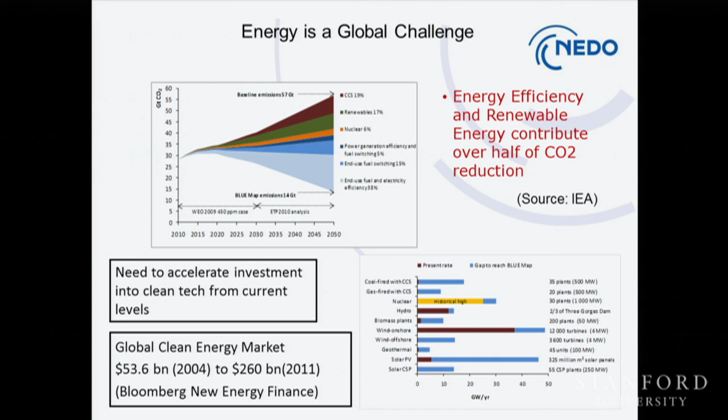Now, in order to reach that, IEA has also done a lot of work in terms of what kind of investments will be necessary. It doesn't talk directly about the CO2 reductions in the transportation sector, but you have to do 35 plants of CCS, 20 plants or 30 plants of nuclear. We have to invest this much in wind onshore. We have to build 55 concentrated solar power plants, etc. So we have this much of investment to do.

Now, this blue part is what we have to do, and this brown part is what we have been doing. So actually, looking into the investment that is necessary, there's a huge amount of investment that has to be done between now and 2050.

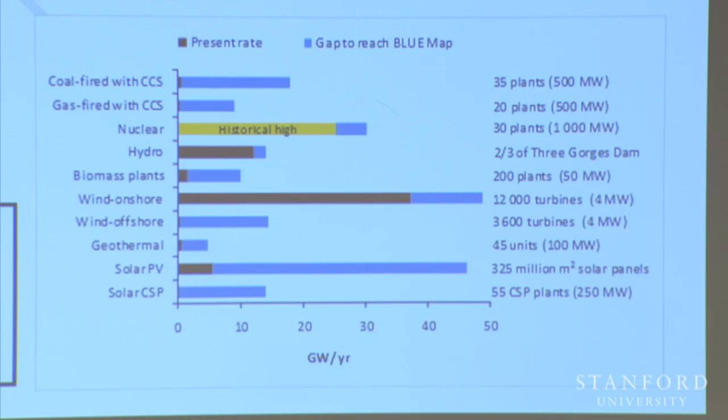If we look at the global clean energy market, according to Bloomberg New Energy Finance, from the level of 53 billion in 2004, it has been increasing to 260 billion in 2011. So actually, even now, at this meager level, we have already increased the global clean energy market by a huge amount. And that shows how much investment potential there is in this market.

This is a slide which I often use, mainly because it tells you something that is common sense. You divide CO2 emissions by energy supply, multiply it by energy supply, you get the same thing. You divide by GDP and you multiply by GDP, you get the same thing. So the right-hand side and the left-hand side is the same. Now, what we want to do is to reduce CO2 emissions, but at the same time, not decrease GDP, but rather increase it or keep it.

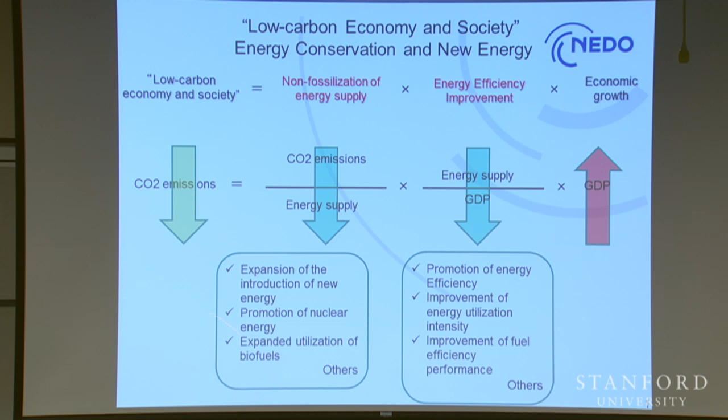Now, in order to do that, you have to reduce these two. So this is CO2 emissions over energy supply, which means non-fossilization of energy supply. So you have to promote nuclear energy, renewable energy, etc. You have to also decrease this energy supply over GDP, that is energy efficiency. So this is promotion of energy efficiency as a whole. So you have to decrease these two to reduce CO2 emissions and increase GDP at the same time. So this is very common sense, but this is something that we have to do.

One of the things that we are thinking in Japan and actually around the globe is this concept of smart community. I think you've heard the word smart grid in a lot of places, for those people who have been involved in the energy area. But this is a concept that we are trying to promote in NEDO. And we actually established a new department called the Smart Community Department, mainly for that purpose.

Especially in the case of Japan, because of our energy situation and land situation, we have to have a lot more emphasis on rooftop solars and distributed generation, because we just don't have the wide lands like in the US.

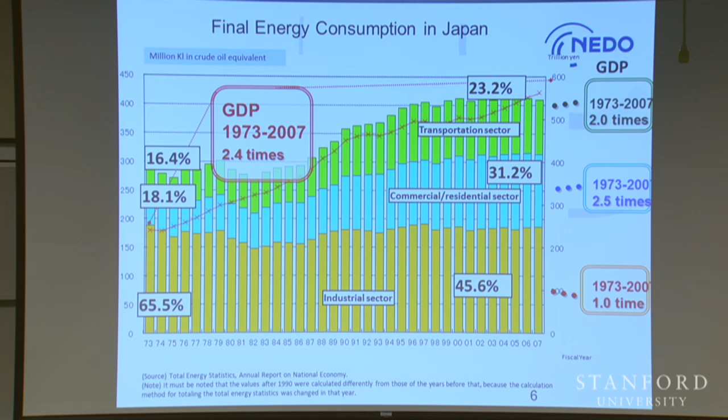The industrial sector, because it's relatively small, you have to deal with a relatively few number of people, it's much, much easier to reduce CO2 consumption than in the transportation sector and the commercial residential sector. And if you look at the transportation sector, it actually uses about a quarter of the energy use. So in order to reduce CO2 emissions by a huge amount, you have to tackle the transportation sector. Let us take a closer look at transport.

The left-hand upper side, transport energy use has stabilized the total from about 2000, and it's actually reducing a little bit. Share of passenger transport has been increasing from 52% in 1990 to 62%, and cargo is like this. If you divide these in two sectors, in passenger transport, the share of automobiles, railway and air is stable. Automobiles in Japan is about 2/3. But this shows that in order to reduce energy consumption in this transportation sector, you do have to tackle passenger transport, especially automobiles. In cargo transport, share of automobile truck has increased from 50% to 63%.

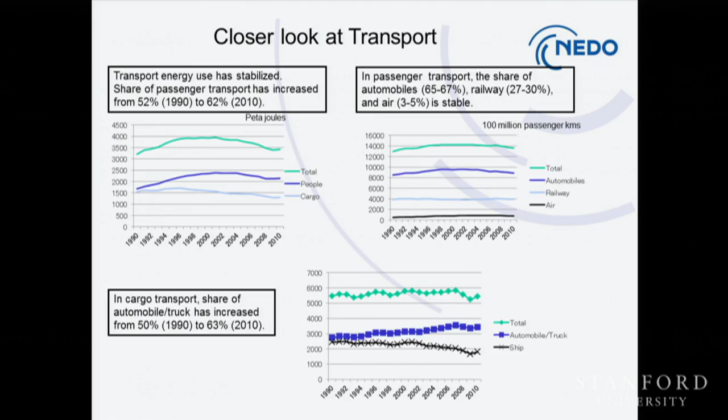That mainly is kind of a factor of people wanting more convenience. If you go to Japan, it's actually very, very convenient because you can have deliveries on time, a little bit different from UPS and the cargo delivery system in the US. You can actually say, oh, between 10 a.m. and 11 a.m. So people have been going from just morning to very specified times, and that actually increases the amount of energy that is used probably to make deliveries, but that's a matter of consumer preferences.

This is an excerpt from METI's long-term energy plan that was made in 2010. And this looked at what the consumption of energy in the transportation sector has to be in order to meet Japan's CO2 reduction goals at that time. Now, having said that, I'll give a proviso in that METI's long-term energy plan is in the process of revision, mainly because of the tsunami, earthquake, and the change in the situation related to energy. According to the 2030 energy plan by METI at that time, a lot of the CO2 reduction was supposed to be done through the increase of nuclear power. From 30% to actually 50% of our electricity was supposed to be provided through nuclear.

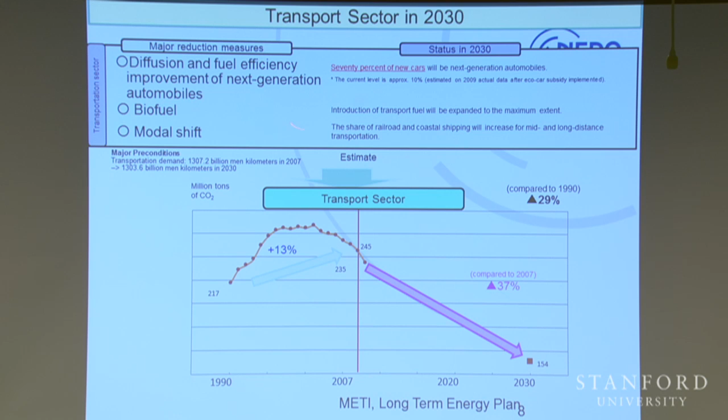The third is to do this through modal shift. That is increasing the share of railroad and coastal shipping for mid and long distance transportation. So those were the kind of options that were being considered, and those are the things that are to be used in the transportation sector.

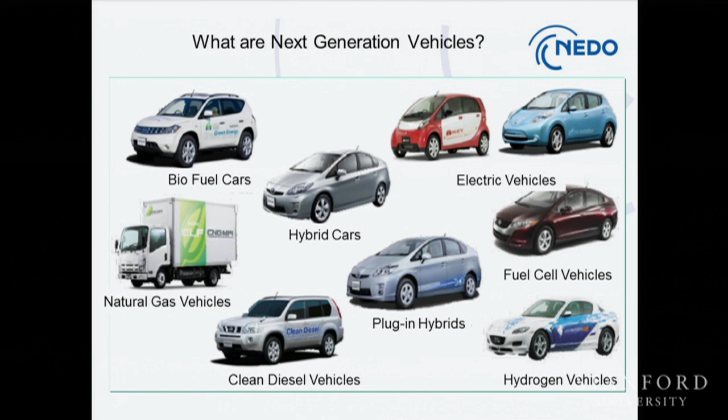Now, based on that, next I'll talk about what are next generation vehicles. So next generation vehicles, as you know, you have biofuel cars, natural gas vehicles, clean diesel vehicles, hybrid cars, electric vehicles, fuel cell vehicles, plug-in hybrids, and hydrogen vehicles. So those are some of the options that are on the table in terms of next generation vehicle options. I'll touch upon a few of them and some of the characteristics of each one.

First is the hybrid. As of the end of 2010, we had 1.4 million hybrid vehicles in Japan, and they are actually the mainstay of what would be termed next generation vehicles. They can reduce CO2 emissions up to 50% compared to current vehicles. But challenges include cost and improvement of batteries, and as I'll talk about a little later, we have been putting in place subsidies to try and promote the changing over of the fleet. Toyota Prius, and there are numerous others that I won't touch upon.

EVs, electric vehicles. As of end of 2011, there were 18,000 vehicles in Japan. Although the i-MiEV by Mitsubishi was the first commercial EV on the market, there's been a really large increase with the Nissan Leaf. They can reduce CO2 emissions by 40% or even down to 0%, depending on what kind of fuel or electricity you use. If you use photovoltaic panels to completely fuel the EV, then you can go down to 0%. But the normal thing right now is about 40% or something like that.

One of the keys, as I will touch upon later, is the need for charging infrastructure. And there are possible range problems at the moment in terms of the current EVs on the market, except for maybe the Tesla, which actually costs a lot more. Some examples are the Nissan Leaf, Tesla, Mitsubishi i-MiEV, etc.

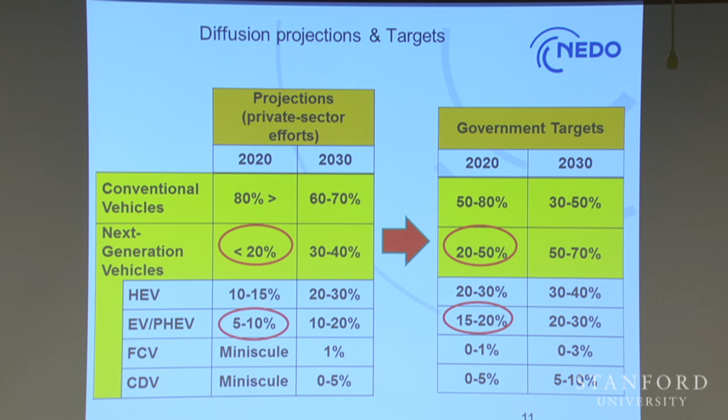So in order to do this, well, you need to have a lot more things put into place. And so that's, I think, one of the logics that was used to put in place the relatively robust subsidies in this area.

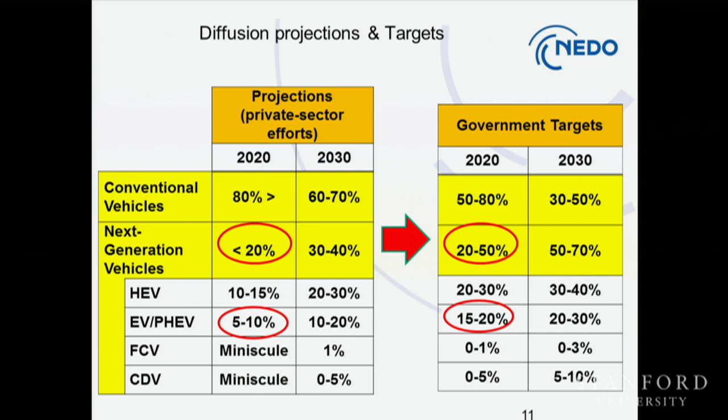Yes? What is CDV? CDV, clean diesel vehicle. Okay. So I guess diesel actually has better fuel efficiency than normal gasoline vehicles. And clean diesel is considered to be one of the options in terms of trying to reduce CO2 emissions. Of course, diesel will continue to emit CO2, but it's more efficient.

Yes? What are the share? You said it was 1.4 million hybrids. And what share of the market? I'll talk on that in the next slide. So the number of next generation vehicles have rapidly increased to 1.5 million cars. As I said, partly hybrid and a very, very small, minuscule amount of EVs. But this is still about 2% of the general fleet. So it's still very, very small.

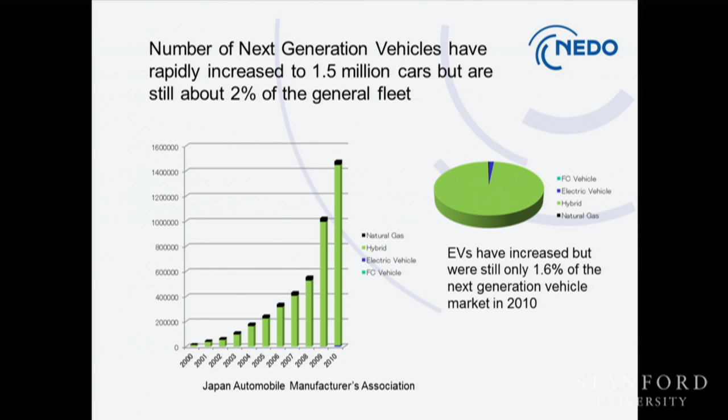It's been increasing at this pace, but as you see, most of them have been the green part, which is the hybrid. So you have a little bit of natural gas, a minuscule part of electric vehicles, and almost zero fuel cell vehicles, of course, except for demonstrations. EVs have increased, but even here, EVs are still only 1.6% of the next generation vehicle market in 2010. And I'll move on to my discussions on EVs.

But having said that, EVs have been increasing quite rapidly. So EV sales are reaching over about 1,000 monthly. The newest data is around January 2012, unfortunately. But I've heard that it's relatively above 1,000, although not as rapid as we hoped it would go. So the Nissan Leaf has made a measurable impact in terms of the rate of expansion of electric vehicles in terms of monthly sales. So about 1,000 monthly.

And what's that spike there? That's when they kind of started. I think this is the result of the subsidy, I think. Yeah.

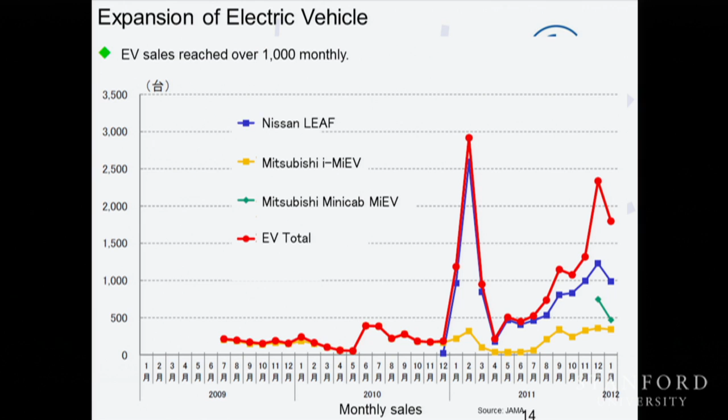So basic direction towards diffusion of EVs: the cost, creating initial demand and reducing cost by producing economies of scale. So as you increase the economies of scale, you'll be able to decrease cost. That actually is something that we have been doing in the area of photovoltaics. I won't dwell on that this time, but in Japan we had relatively robust photovoltaic subsidies in place, and that was actually one of the things that allowed the initial reduction of the cost of photovoltaic panels. And after you get a certain price, then you start to increase the market quite rapidly.

So maybe it's just me, but I'm very unfamiliar with these subsidies. Can you go into more detail? I will go on that later.

Yes. Second, performance. So currently, as you know, EVs still have a range limitation. I'll go into that later. But in order to change that, you have to increase the battery performance. Also, as I said, infrastructure is very, very key in order to increase the deployment of EVs and have consumers more comfortable with the idea of having EVs.

And from that point of view, one of the things that the government has been doing is what's called EV and plug-in hybrid vehicle towns. So the government actually cooperates with the local community. They started off with Fukui, Kyoto, Nagasaki, Niigata, Aomori, Tokyo, Kanagawa, with these prefectures cooperating to, one, increase the infrastructure of EVs, and at the same time get these prefectures to buy a certain number of EVs to kickstart the market, and also to increase consumer awareness of EVs. So that's what we've been doing, and this has been increasing to those prefectures in red.

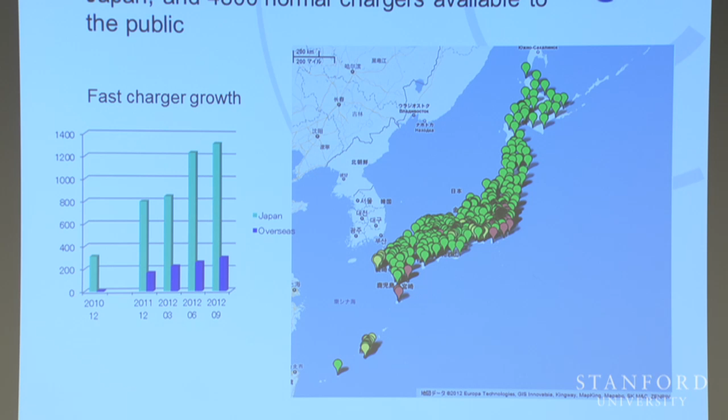The main reason that is the case is because there are no quick chargers, and it will take, as I said, if you try to charge a car with a normal charger, 17 hours to do that, or 10 hours, as the case may be. So unless you are an adventurer trying to make a point, you will not do that. So that is the situation in Japan and US.

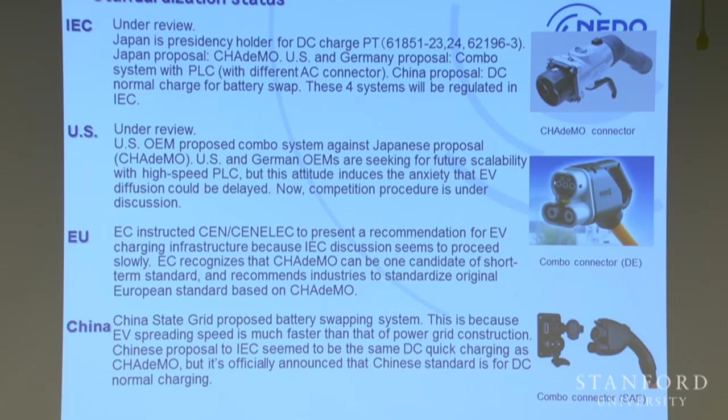In the case of the CHAdeMO, you have to have one normal charging connection and a separate one. So it's a little bit of a difference in philosophy, and also in terms of the speed of the charging. The CHAdeMO connector, as I said, takes somewhat more time than the SAE and combo connector. But having said that, if you look at the quick charger installations, the power box enclosure, there's actually a lot of commonality between the chargers.

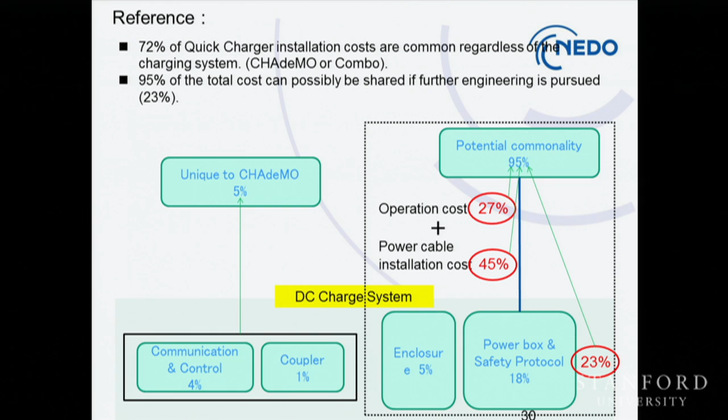And according to the discussions that I have had with charging station manufacturers, you are actually able to flip over a CHAdeMO quick charger and retrofit it to meet other standards. And so probably the standards issue is no longer an issue in terms of delaying the installation of quick chargers.

So in conclusion, what we have to consider now is trying to put an emphasis on users. I think there are a good number of EV users already in California who are feeling somewhat stranded in terms of lack of infrastructure. And so how to try to ensure the compatibility of devices going into the future, while putting in place the necessary infrastructure for them. And constructive cooperation between the various manufacturers is going to be necessary going into the future.

Next, I'll go on to fuel cell vehicles. I've already run out of time. Or, no, you're okay. I'm okay? We'll take the time. Okay.

So industry trends for fuel cell vehicles and H2 stations. As I said, fuel cell vehicles are another kind of vehicle that is of great interest. EVs are good for shorter hauls, but they have to carry a battery. So you don't want to put a huge amount of battery to haul cargo, etc. And so fuel cell vehicles are said to be good especially for cargo-related applications. And if you look at the automobile manufacturers, be it BMW, Toyota, Honda, Nissan, etc., they are all trying to launch fuel cell vehicles, and they are saying that they will start commercialization in 2015.

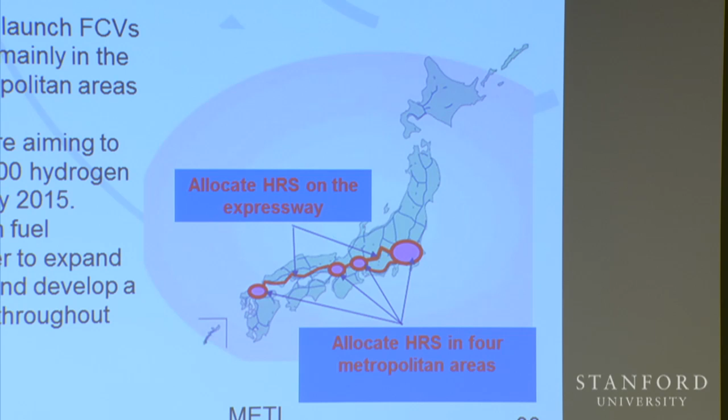Now, in order to kickstart that, what we want to do is to make an expressway between the four major population centers in Japan: Tokyo, Nagoya, Osaka, and Fukuoka. And the hydrogen fuel suppliers, on the other hand, think this might be a good business, and so they are aiming to construct approximately 100 hydrogen refueling stations by 2015. And hopefully they will work together to create a new market. So this is a commercialization scenario which is being considered.

Between 2011 and 2015 is the market demonstration period. 2015, as I said, is the start of sales of fuel cell vehicles, with early commercialization up to 2025. And then 2025 onwards will be full commercialization. So they want to try to reach approximately 1,000 hydrogen stations and approximately 2 million fuel cell vehicles by 2025. Whether that is possible in a period of 10 years from 2015, that's a pretty aggressive target, but who knows?

Now, for the first stage, a number of hydrogen stations are being put in place for demonstration of the technologies. You can see there are a number of fuel cell stations, especially in this relatively big corridor, as I showed you.

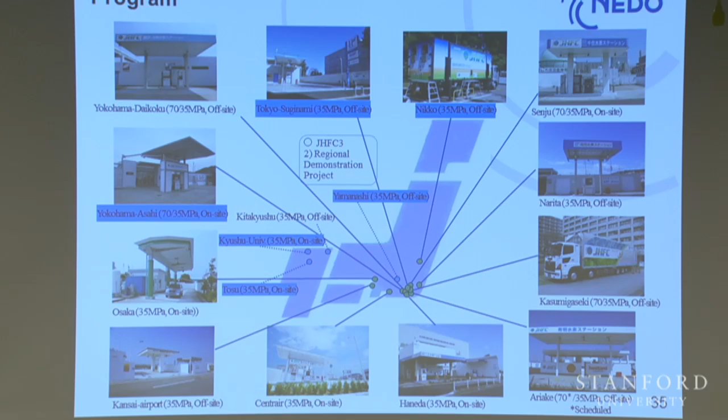A number of demonstrations are being put in place to prepare, like welcome home taxi service, airport taxi. Those are the kind of applications because the fuel cell vehicle is still very expensive, so you need to do it in an orderly manner. You can't really do it for normal households yet, it's too expensive a vehicle for that.

So these are some applications that are being explored. They're also putting in place airport limousines, ramp buses, etc. to do fleet demonstrations.

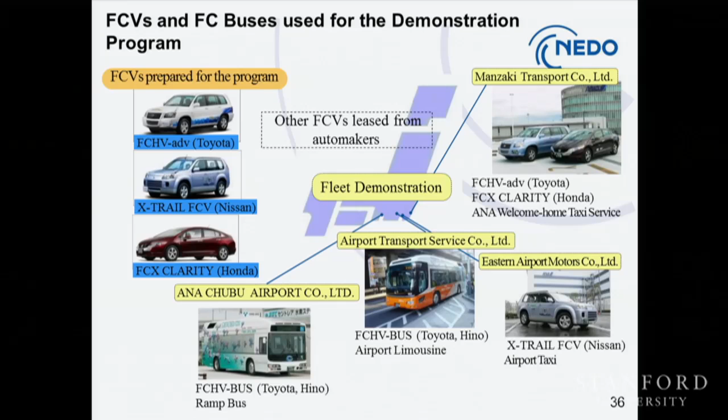The number of hydrogen stations in Japan as of 2011 was 16, increasing to 19 in 2012, and hopefully more going into the future. I think California is in a similar situation in terms of deployment.

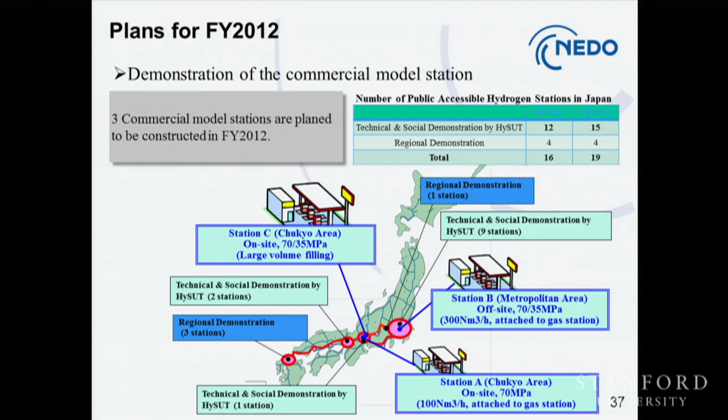So with that, I'll also discuss NEDO's projects in transportation. NEDO, as Dr. Dasher said, is doing a number of projects in the US and across the world. One is in New Mexico, a smart grid/microgrid demonstration we're doing in Albuquerque and Los Alamos.

The other is in Maui Island, in the state of Hawaii, which I will go into greater detail on. We also are doing a number of projects in France, China, and Spain.

This project in Maui is called the Japan-US Island Grid Project. If you look at Hawaii, it's an isolated island, so it has its peculiar challenges and opportunities.

In terms of challenge, because it's a small island, it costs a lot to bring oil and gasoline from outside. So if you've been traveling in Hawaii sightseeing, you get sticker shock when you go to the gas station every time.

On the other hand, it actually has benefits as well. One is that Maui Island and the Hawaiian Islands are blessed with renewable energy in terms of solar and wind, etc.

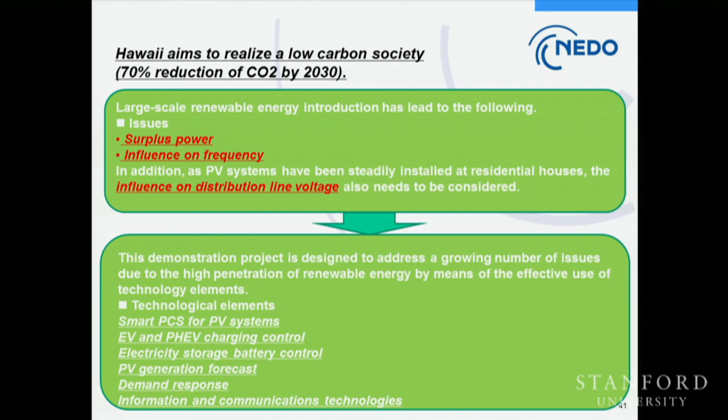At the same time, the more PV systems and the more EVs you have on the grid, it can also cause a lot of problems in the distribution line. So this is an island-wide problem, and this is a very local problem. You have to figure out how to solve both of them at the same time. And so what we are doing in Maui Island is to put in place an island-wide smart EV system to coordinate the charging of the EVs so that they do not coincide at the same time.

For example, if I drive an EV back home, I plug in the EV at 6 p.m. Everybody does that at 6 p.m. You probably have a blackout if you have a good number of EVs. So what we want to do is to stagger the charging between 6 p.m. and 7 a.m. or 8 a.m., as the case may be, so that the load will not be coming on at the same time.

At the same time, you have these local problems, as I said. If you have a certain number of EVs on a pole-top transformer or the feeder, and they all charge at the same time, this will blow up. And so you don't want to have that either. So you want to coordinate both at the same time, and in order to do that, you may need more intelligence in the grid. So we're putting in place an island-wide EV charging system and a localized control system in an area called the Kihei district in Maui Island.

We are also considering expanding that to include vehicle to home and vehicle to grid, which is actually being commercialized in Japan, especially the vehicle to home part, as there is bigger anxiety about energy supply after the earthquake and tsunami. So with that, that concludes my presentation.

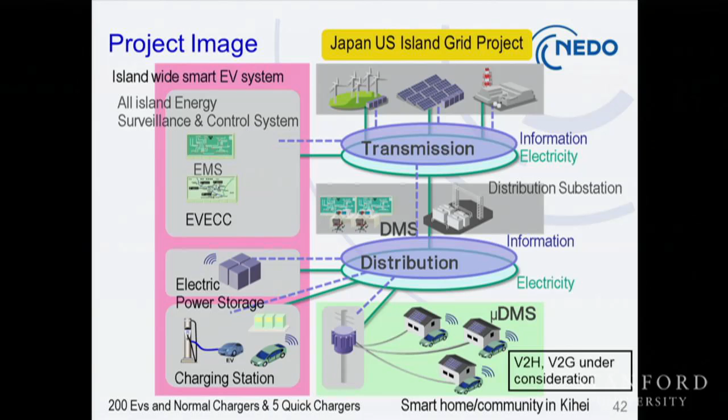Oh yeah. It's not really a plan. It's just a matter of fact that if you use electricity, you can reduce CO2 emissions to anywhere between 0% and 40%. Now, the reason for the 40% is that in the case of combustion fossil-based automobiles, you are actually emitting a lot of heat. And although gasoline engines in a car are more fuel efficient than they used to be, they are still less efficient than the most efficient gas turbines generating electricity.

So as a combination of that, by using EVs and the current fuel composition in Japan, you are able to reduce CO2 emissions by 40%, or to 40% of the current vehicle. But on the other hand, if you are able to change over to all nuclear and all renewable energy, for example, which probably needs to be the case 200 years from now, let's pick a number, or 300 years, then it will be 0%.